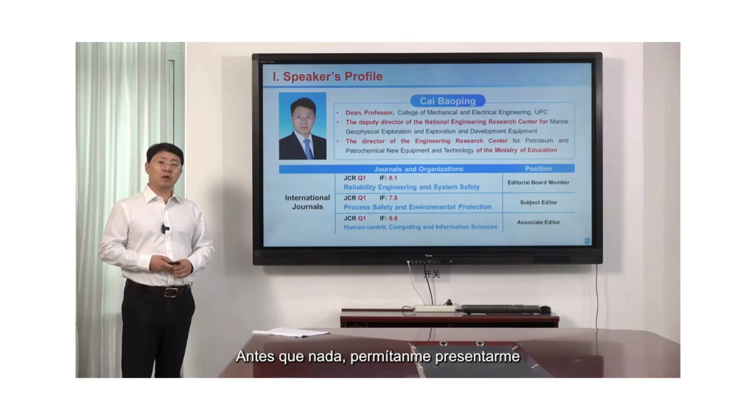First, please allow me to introduce myself. I'm the Dean and Professor of the College of Mechanical and Electrical Engineering. Currently, I serve as the editorial board member, subject editor, and associate editor of 3 SCI indexed journals.

Let me introduce my university. It's located in the beautiful city of Qingdao. China University of Petroleum is short for UPC. It's a national key university, one of the national double first-class universities, and one of the national Project 211 universities.

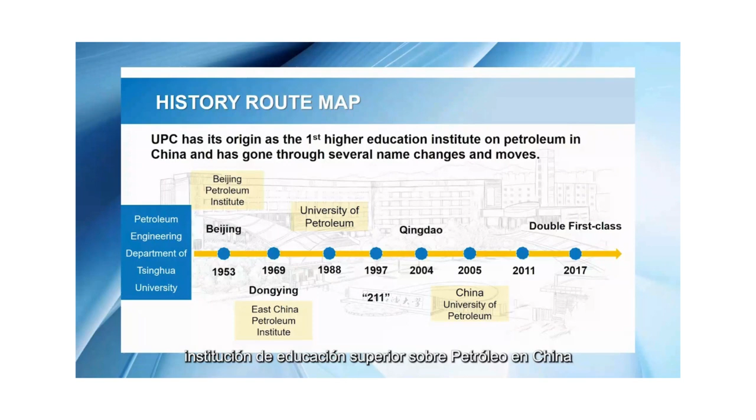UPC has its origin as the first higher education institute on petroleum in China, and has gone through several name changes and moves.

There are more than 19,000 undergraduate students, more than 11,000 postgraduate students, and more than 900 international students. At present, UPC has more than 3,000 faculty and staff, including more than 1,000 professors and associate professors.

We could be proud of the fact that UPC ranks first in the quality of graduates among universities with first-class disciplines, and UPC performs well in many academic rankings.

A lot of resources are invested in scientific research. At UPC, there are 8 national research platforms. UPC's engineering ranked 46th globally.

Our teachers and students have achieved many research results since 2016.

Students enjoy a vibrant, diverse, and safe life at the university. Our campus is a busy place with more than 100 student organizations.

As the Deputy Director of the National Engineering Research Center, I will introduce this institute. It was established by the National Development and Reform Commission in 2016.

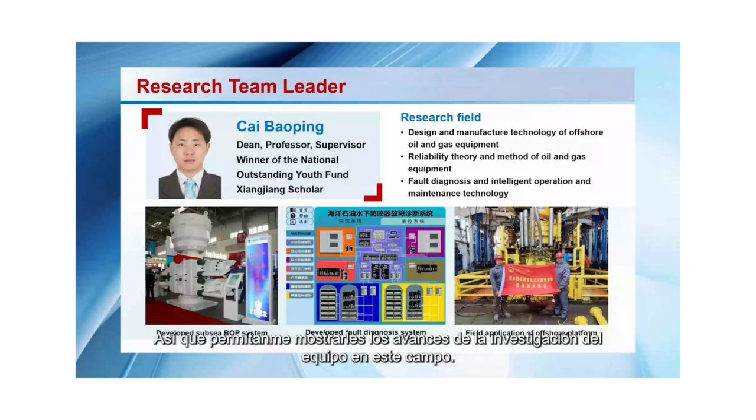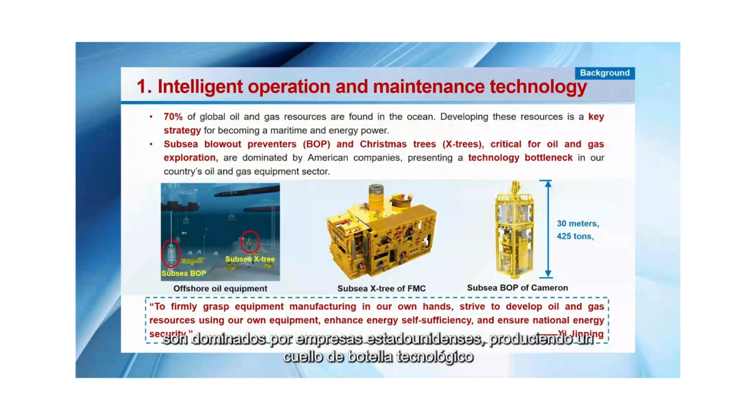Developing these resources is the key strategy for becoming a maritime and energy power. Subsea blowout preventers and Christmas trees, critical for oil and gas exploration, are dominated by American companies, presenting a technology bottleneck in our country's oil and gas equipment sector.

The absence of an efficient solution for ensuring high reliability design and efficient health management of subsea BOP and Christmas tree is a major obstacle to the advancement of oil and gas equipment.

In view of the challenges faced by subsea BOP and subsea Christmas tree, such as poor operating reliability, low diagnosis accuracy, and high operating cost, 3 scientific issues are clarified.

Research on design method, diagnostic technology, and health management method was carried out. 3 innovative outcomes are achieved.

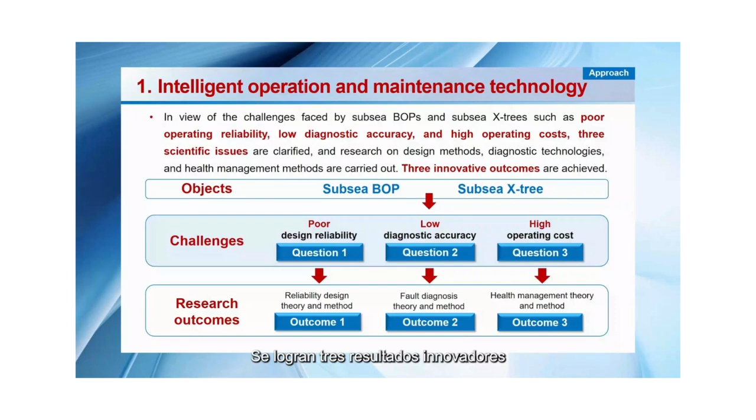In the study of high reliability design method of subsea BOP system, there are many challenges and difficulties in front of us. The reliability of key mechanical components is unevenly distributed. The control system had poor switching performance and weak ability to withstand common cause failure.

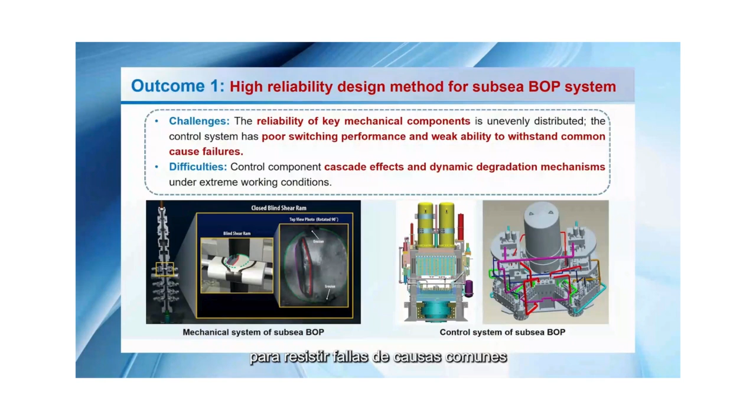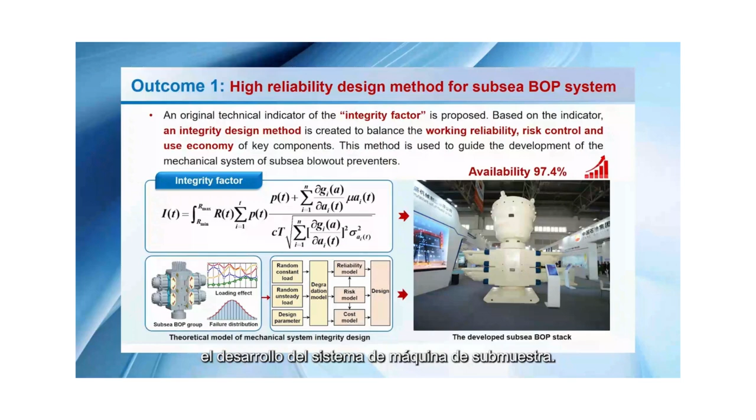An original technical indicator of the integrity factor is proposed. Based on the indicator, an integrity design methodology is created to balance the working reliability, risk control, and use economy of key components. This methodology is used to guide the development of the mechanical system of subsea blowout preventers.

A new concept of source shock probability is proposed. The cascading failure rules of control components are described, and the voting algorithm, arbitration logic, and seamless switching method are developed. Based on the technology, the control system of subsea BOP is developed by a company of China, Rongsheng, which is certified by DNV and API.

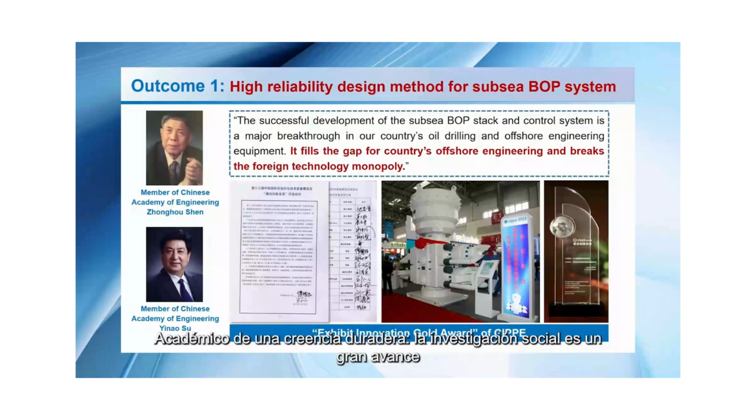The expert group, composed of academics Shen Zhonghou and Su Yinao of the China Academy of Engineering, believes that our research is a major breakthrough in our country's oil drilling and offshore engineering equipment.

Now let's talk about our second outcome, non-permanent and concurrent composite fault diagnosis. In the same way, we faced a number of challenges in conducting this research. Conventional, non-permanent, and concurrent composite faults exist in the subsea BOP and the Christmas tree. The fault characteristics are strongly coupled with noise signal, making it difficult to extract, separate, and diagnose.

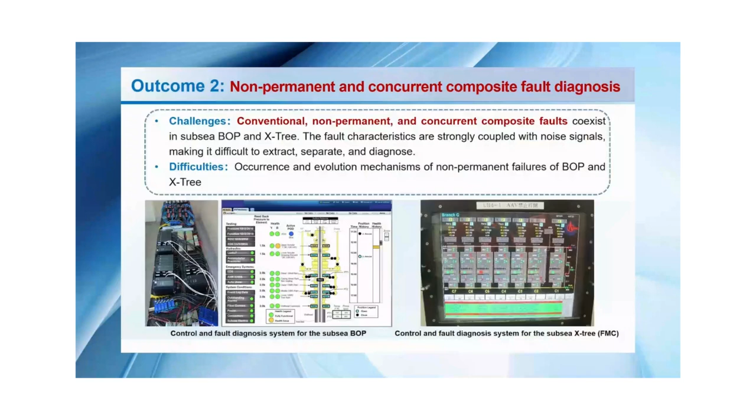The state transition rules of transient, intermittent, and permanent faults of subsea BOP are revealed with Markov models, and a big data-driven online monitoring and fault diagnosis method is proposed. The accuracy of the subsea BOP fault diagnosis reached 98%.

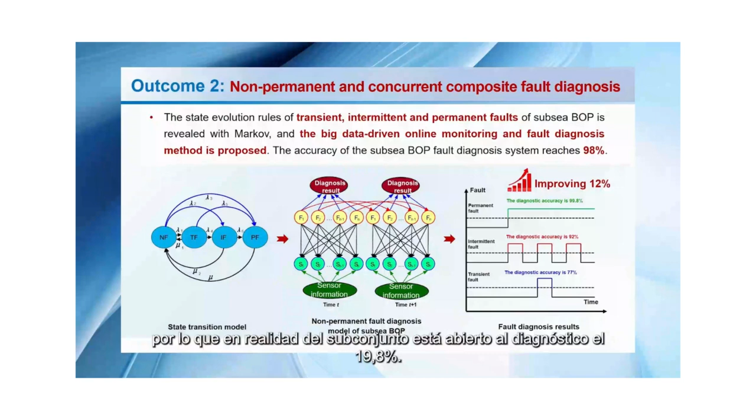The mapping relationship between multi-point concurrent composite fault and multiple symptoms is discovered, and an intelligent fault diagnosis method for subsea tree that integrates multi-source information is developed.

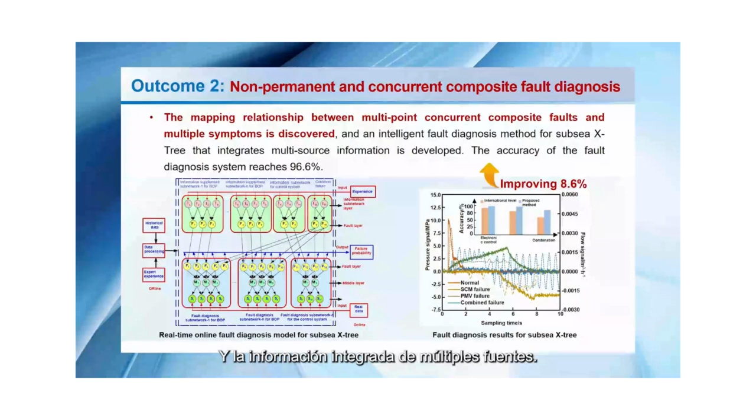Based on this method, several sets of subsea BOP and Christmas tree diagnosis hardware and software have been developed, which are certified by BV and have been used in drilling platforms.

The third outcome is fault prognosis and health management for subsea systems. The health management method lacks deep integration of cyber and physics. This results in low fault prediction accuracy, long maintenance cycles, and high operation cost. Achieving the unity of information and physical system description of subsea BOP and Christmas tree is a difficult problem.

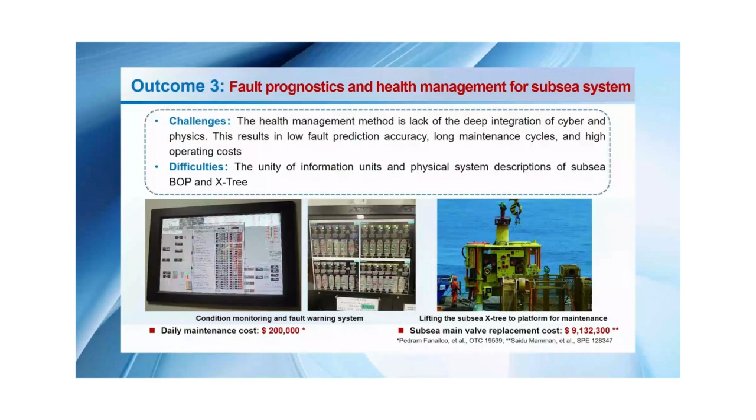To solve the above problem, the phenomenon of equipment degradation dependency leading to sudden change in its RUL is discovered. Combining dynamic update of conflict evidence, real-time interaction, and consistent tracking of equipment, cyber-physics integration is achieved. A re-prediction method is created and a fault prediction software system is developed.

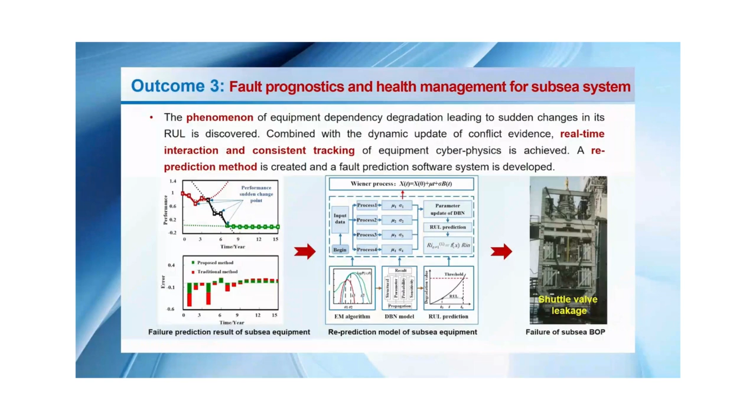The condition-based maintenance method for subsea Christmas tree centered on availability is proposed, and a health management method of early diagnosis, fault prediction, and maintenance decision-making is constructed. The condition-based maintenance software system is used in an oil field in the South China Sea.

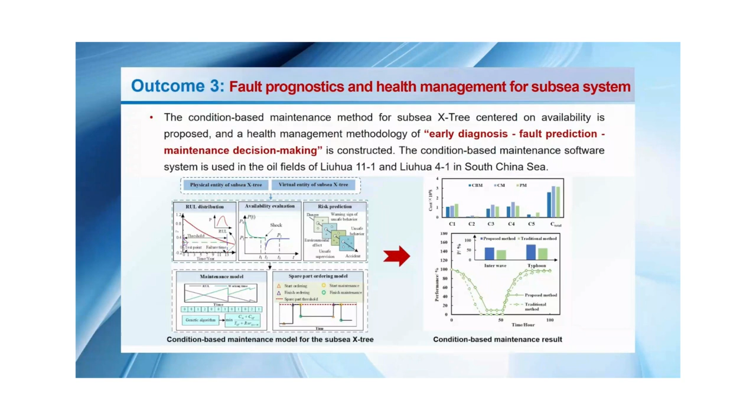Let me show the engineering application of fault diagnosis of subsea BOP control system. We did lab testing. A fault diagnosis experiment is conducted in the offshore oil and gas equipment technology laboratory of China University of Petroleum.

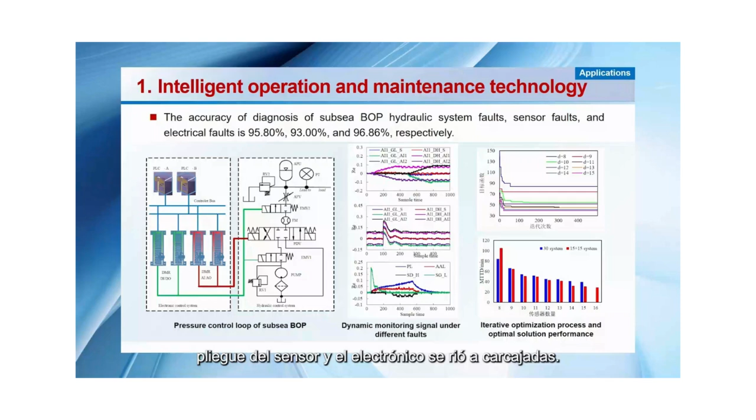The accuracy of diagnosis of subsea BOP hydraulic system fault, sensor fault, and electronic fault are all more than 90%.

We did factory testing. The accuracy of 50 randomly set faults is 100%, and the BV company conducted a third-party witness on the entire process.

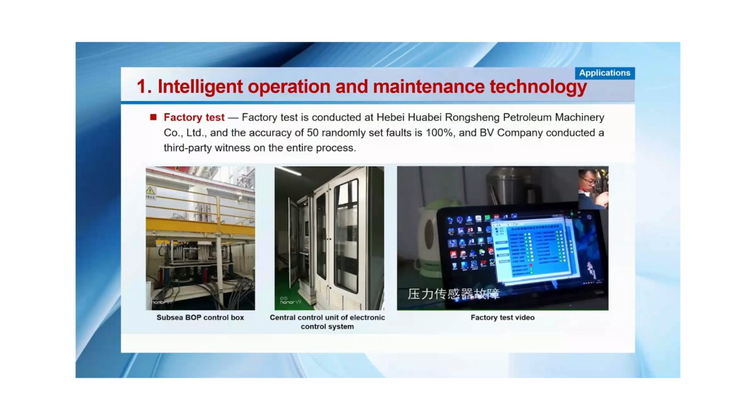Most important of all, our team went to the offshore plant to test the system. On-site testing is conducted on subsea BOP of offshore drilling platforms Haiyang Shiyou 981 and Nanhai number 10.

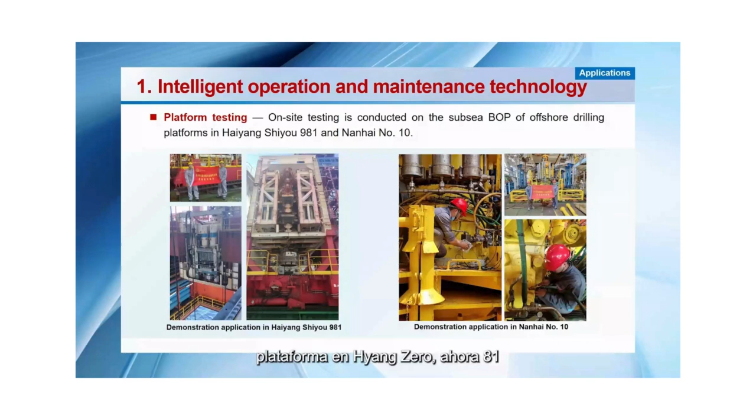Now, what I'm showing you is the intelligent operation and maintenance system of subsea production system. The on-site testing is conducted on the subsea Christmas tree in Liuhua 41 oil field.

The diagnosis accuracy of the minor and compound faults in subsea production system is 98.4% and 96.7% respectively.

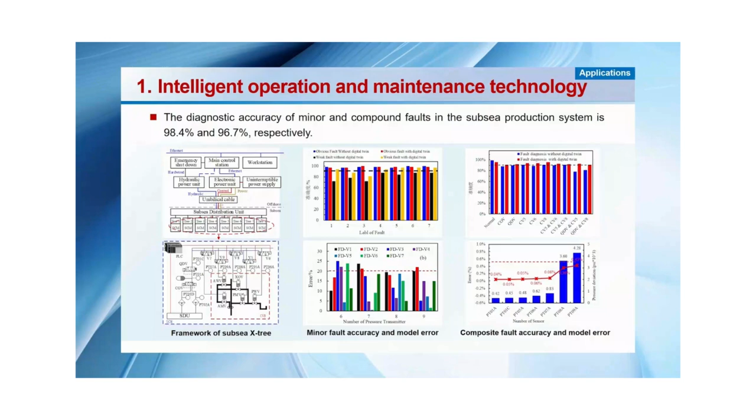Next, I will introduce the in-depth profile control and water shut-off technology. The technology comes from Professor Dai's team. Professor Dai is a winner of the National Science Fund for Outstanding Young Scholars, a Changjiang Scholar, and a leading talent in the Ten Thousand Talents Plan. Her team's research interests include oilfield chemistry and EOR, and chemical water control technology for high water cut oil fields.

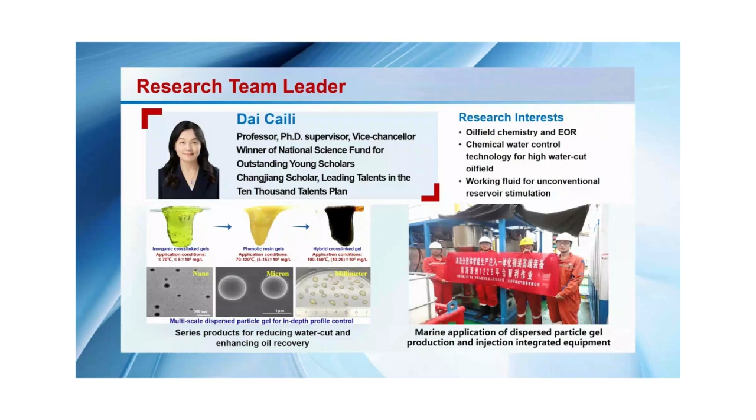In the process of water flooding development in oil fields, water tends to break through along high permeability layers or fractures, resulting in higher water production and low oil production.

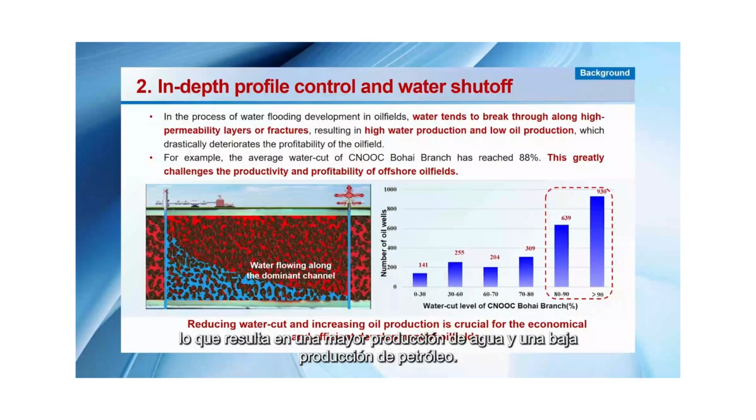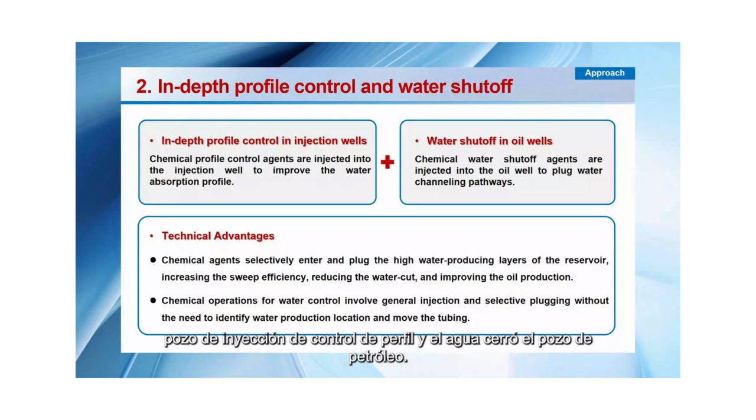To solve the above problems, Professor Dai proposed in-depth profile control in injection wells and water shut-off in oil wells. This approach can increase sweeping efficiency, reduce water cut, and improve oil production without needing to identify the water production location or move the tubing.

The first outcome is dispersed particle gel for in-depth profile control, utilizing crosslinking and dispersion technology. Dispersed particle gels with different particle size distributions are obtained by mechanical shearing and physical rounding of specific bulk gel formed on the ground.

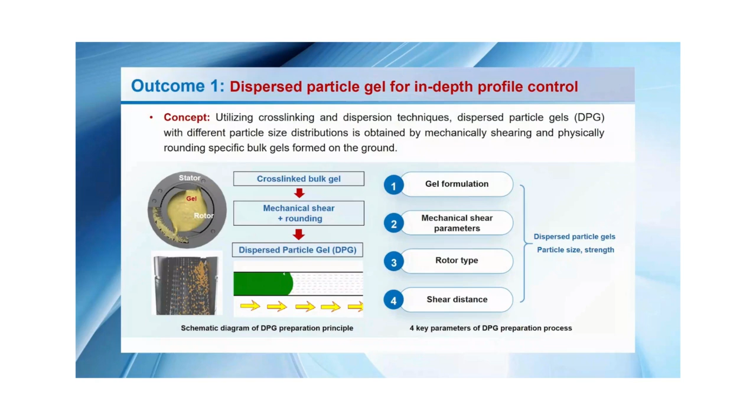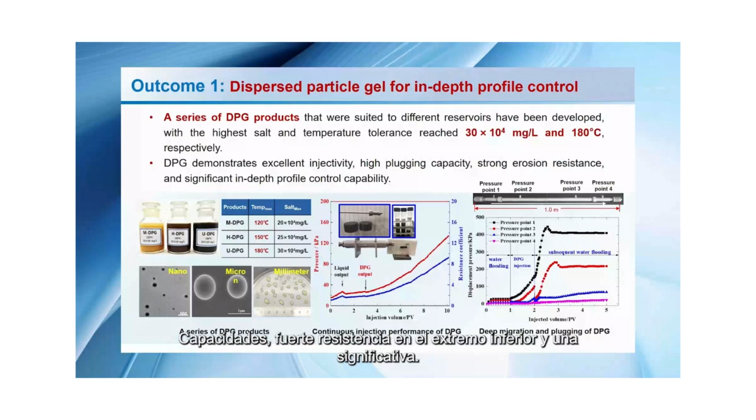A series of DPG products suited for different reservoirs have been developed. DPG demonstrates excellent injectivity, high plugging capacity, strong erosion resistance, and significant in-depth profile control capability.

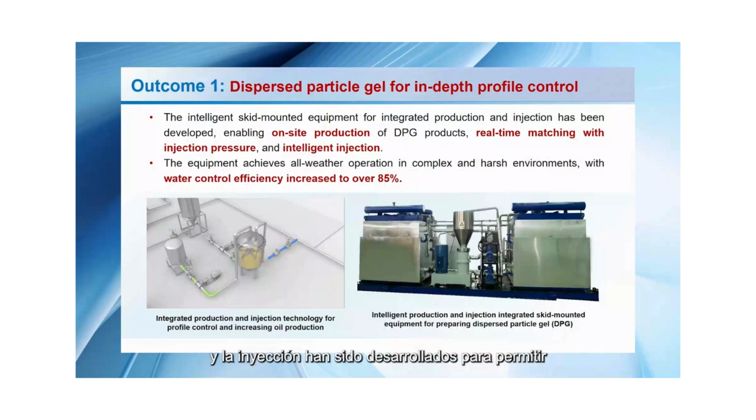Intelligent skid-mounted equipment for integrated production and injection has been developed, enabling on-site production of DPG, real-time matching with injection pressure, and intelligent injection.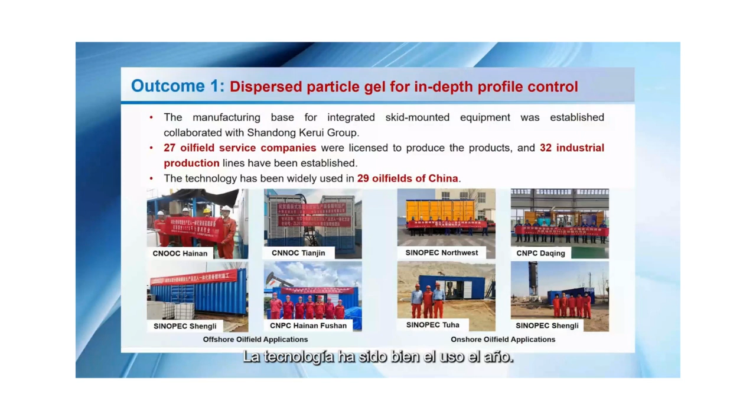27 oilfield service companies were licensed to produce the products, and 32 industrial production lines have been established. The technology has been well used in 29 oil fields in China.

The second outcome is water shut-off in oil wells. For different water invasion types, the following processes have been developed: pressure-temperature field matched sequential in-depth water shut-off; chemical barrier for controlling bottom water ridge advancement; and integrated nitrogen-CO2 energetic drainage plugging for water control.

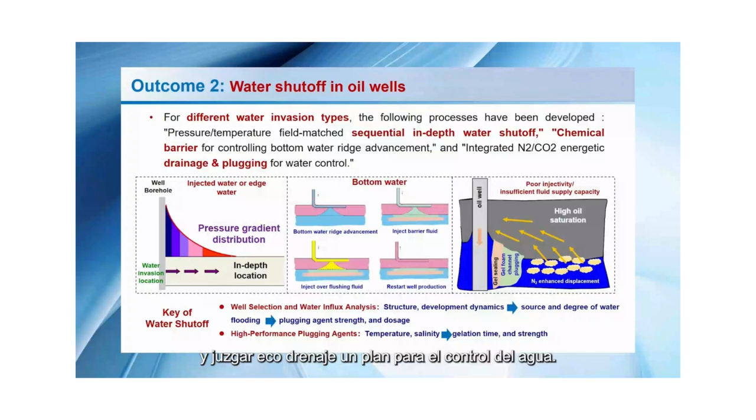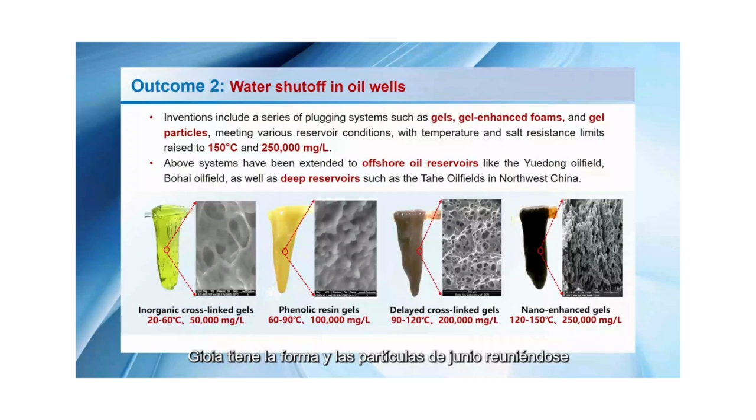Inventions include a series of plugging systems such as gel-enhanced foam and gel particles, meeting various reservoir conditions. Since 2015, 160 water shut-off operations have been finished, with an 85% success rate.

Next, I want to share deep water wellbore flow safety control technology with you. The technology was proposed by Professor Sun Baojiang, a Changjiang scholar of China University of Petroleum. His team's research interests include the theory and technology of deep water oil and gas drilling well control, and deep water wellbore natural gas hydrate prevention technologies.

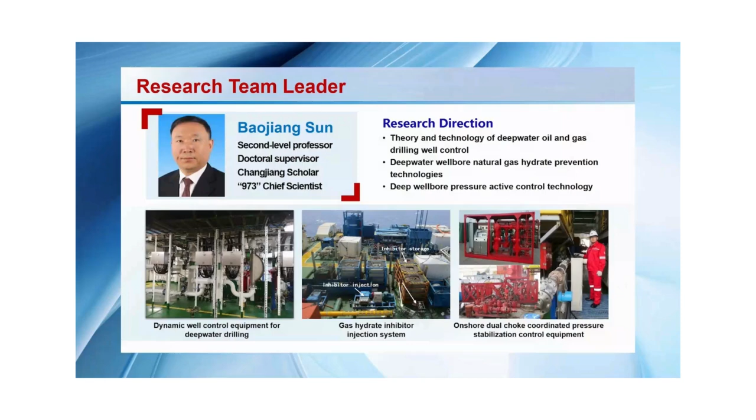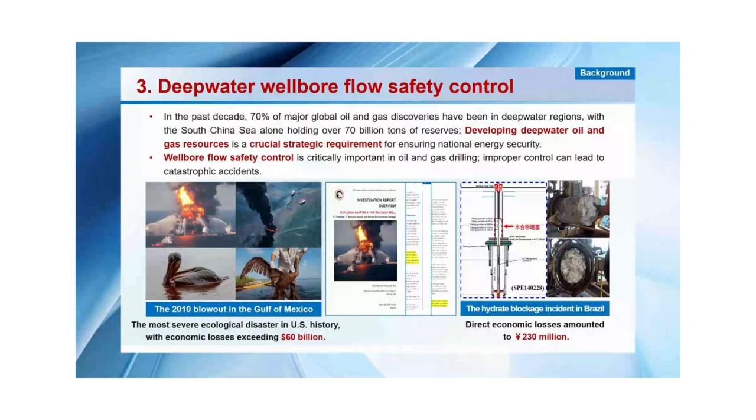Wellbore flow safety control is critically important in oil and gas drilling. Improper control can lead to a big accident. China's deep water and deep oil and gas resources are abundant, but the resources are characterized by 3 high, 1 low, and 1 narrow factors. Wellbore flow safety control faces more serious challenges.

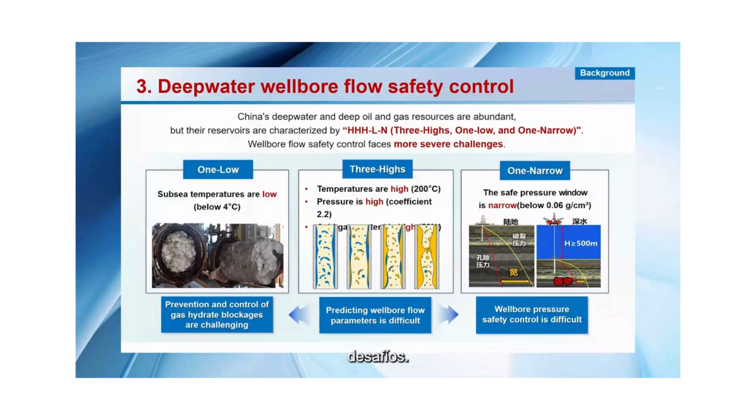To solve this problem, Professor Sun's team proposed 3 inventions, established the enterprise standard and regulation for well control, and demonstrated their application internationally.

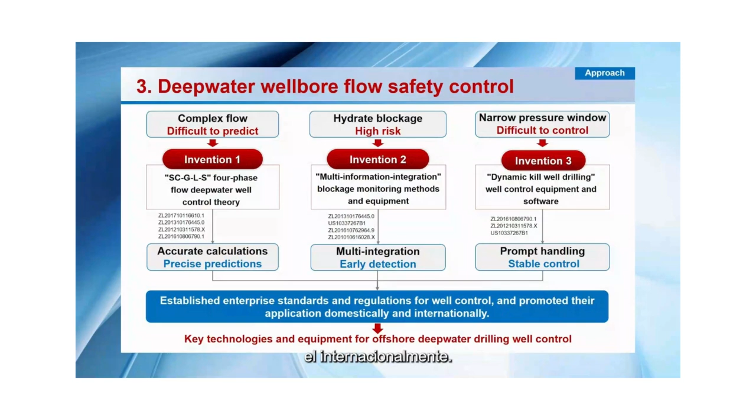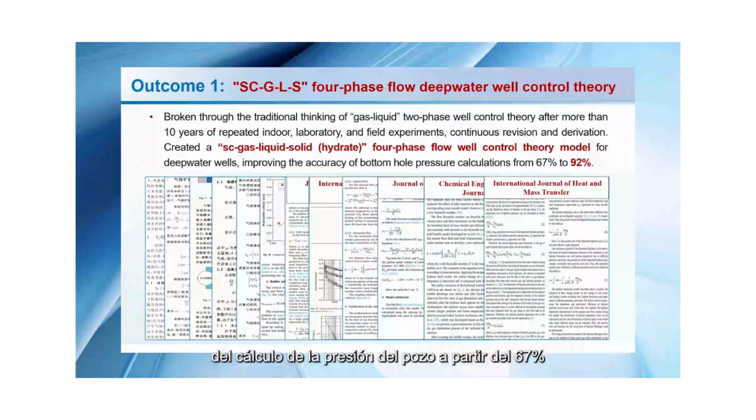The proposed method improved the accuracy of the bottom hole pressure calculation from 67% to 92%.

The second outcome is the key technology and application for hydrate prevention. They established a multi-component hydrate phase equilibrium prediction model considering the influence of acid gases, and proposed a dynamic prediction method for hydrate formation under different conditions. During deep water gas well testing, they achieved real-time precise location of hydrate formation positions, laying the foundation for efficient hydrate prevention.

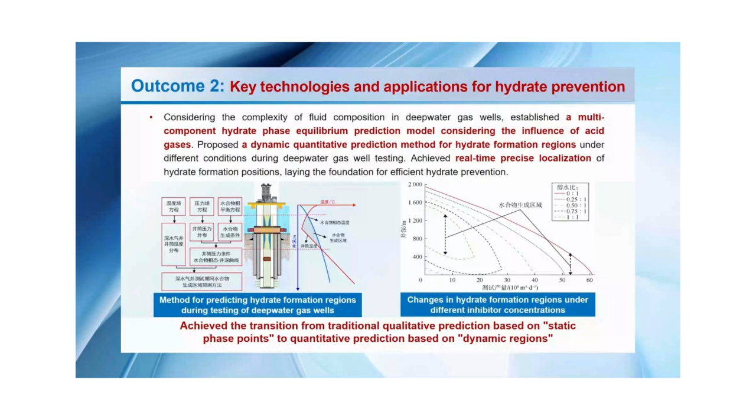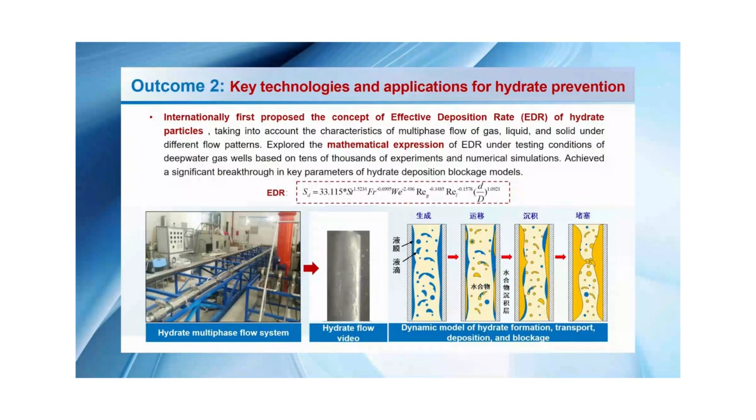They proposed the concept of effective deposition rate of hydrate particles, taking into account the characteristics of multi-phase flow of gas, liquid, and solid under different flow patterns. They established a dynamic model for hydrate formation, transport, deposition, and blockage during deep water gas well testing, with prediction accuracy exceeding 92%, resolving the challenge of accurately locating hydrate blocking risk during deep water gas well testing.

They selected dual effect inhibitors and proposed a method for hydrate blockage prevention, involving the synergy between insulation testing fluid and the dual effect inhibitors, greatly reducing the risk of hydrate blockage.

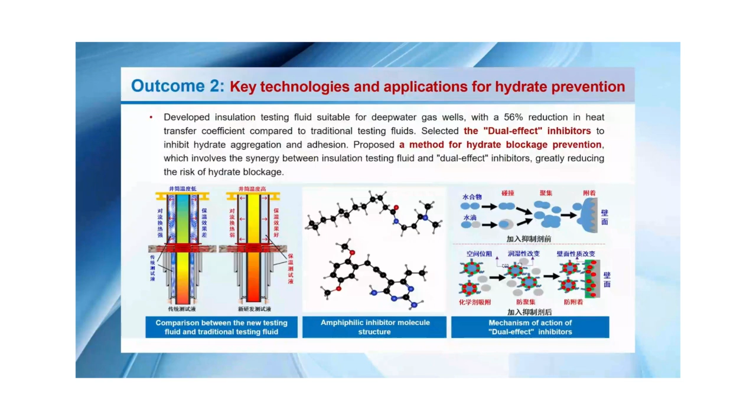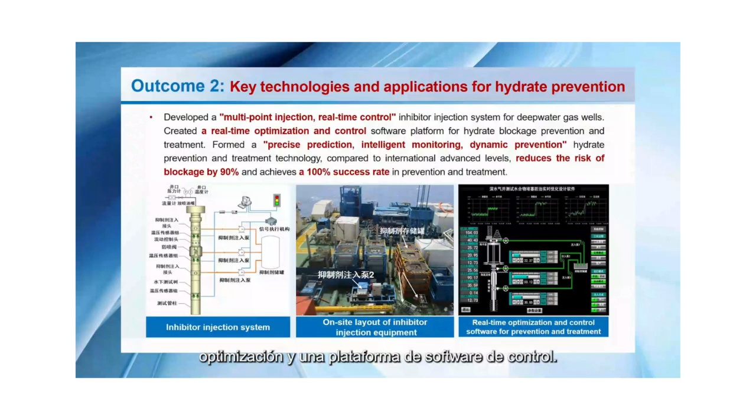Professor Sun's team developed a multi-point injection, real-time control inhibitor injection system for deep water gas wells, and created a real-time optimization and control software platform.

The third outcome is technologies and equipment for drilling well control. Professor Sun's team developed a downhole transient response measurement device for temperature and pressure during drilling.

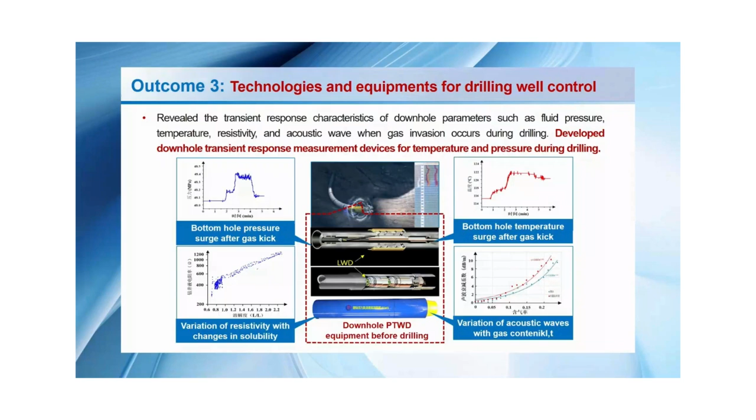They created a multi-information integration block warning software based on downhole and surface flow rates, and invented a multi-information integration early gas kick monitoring technology and equipment from downhole and surface.

The team developed the leading deepwater well control software platform. They achieved real-time optimization and control of well control parameters, providing the brain for the well control equipment.

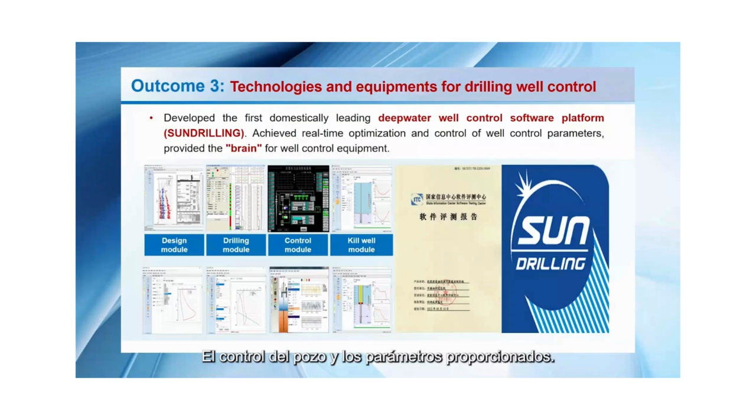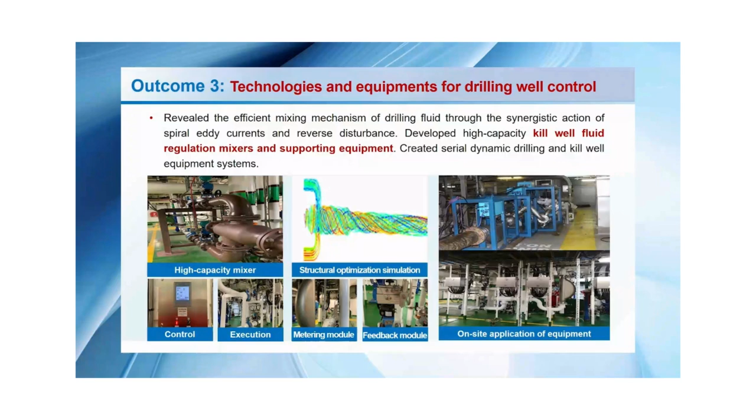They developed high-capacity kill well fluid regulation mixers and supporting equipment, and created a series of dynamic drilling and kill well equipment systems. The active wellbore pressure control technology has been applied in many wells across several deepwater oil and gas fields.

Next, I want to share offshore engineering equipment design and manufacturing with you. The technology was proposed by Professor Xiao Wensheng, director of the National Engineering Research Center. His team's research interests include theory and technology of offshore oil and gas equipment, permanent magnet direct drive drilling oil and gas equipment technology, and so on.

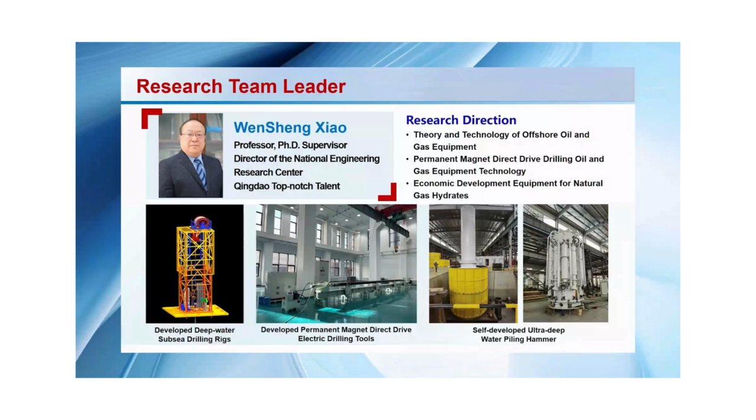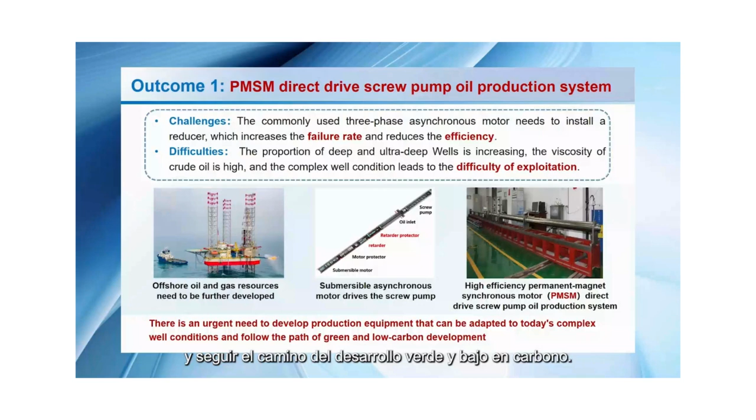China's offshore engineering equipment manufacturing industry has low market share, insufficient research and development, and several other problems. The commonly used three-phase motor needs to install a reducer, which increases the failure rate and reduces efficiency. There is an urgent need to develop production equipment that can be adapted to today's complex well conditions and follow the path of green and low carbon development.

In view of the current industrial pain points, the team, after 3 years, designed and developed a set of subsea PMSM-based submersible oil production equipment, which is suitable for the current situation of high sand and heavy wax oil wells, with high efficiency, strong reliability, and low energy consumption.

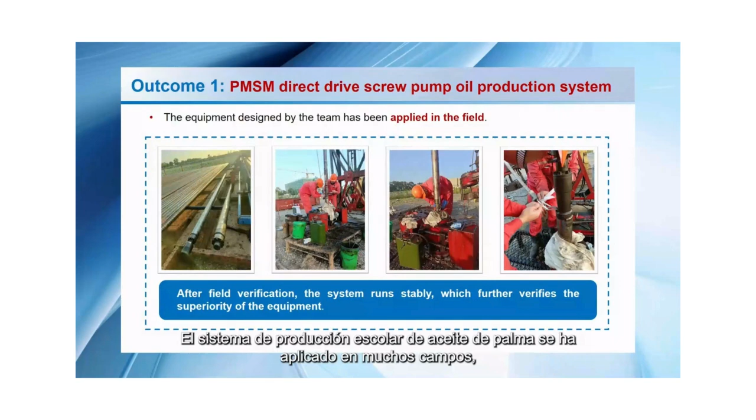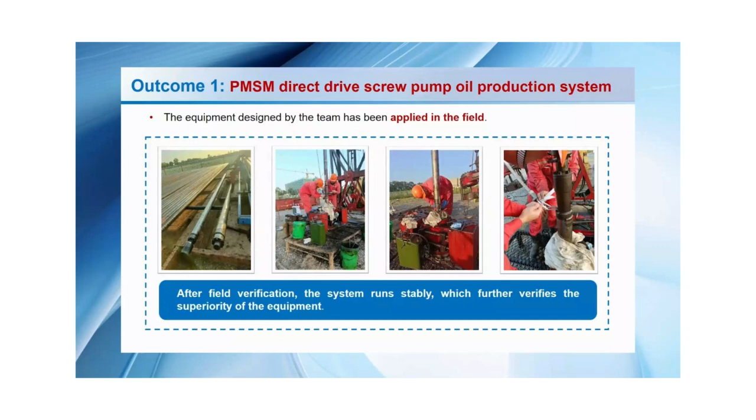The PMSM direct drive screw pump oil production system has been applied in many fields. After verification, the system runs stably, which further confirmed the superiority of the equipment. With its advantages of energy saving, high efficiency, and low failure rate, the equipment is unique in the exploitation of complex well conditions.

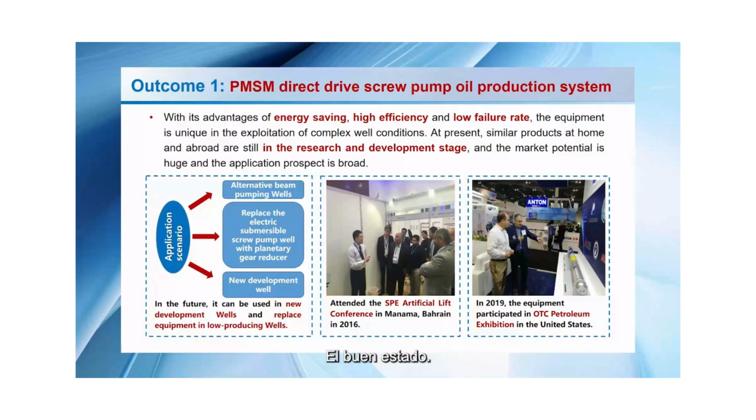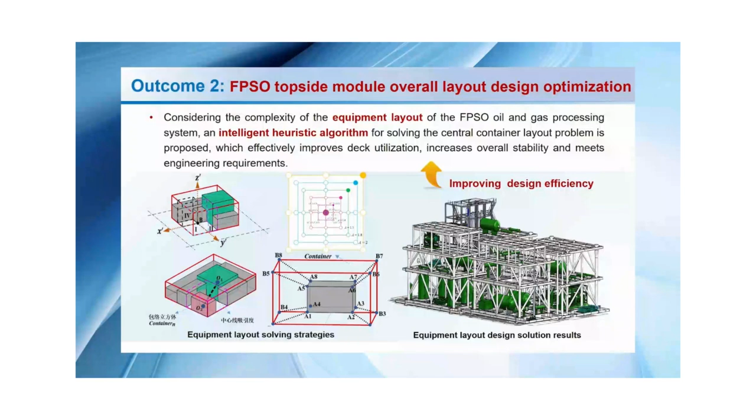The intelligent optimization hybrid algorithm for solving a multi-pipe layout problem of a complex system is proposed, which efficiently reduces the pipe construction cost and the pressure loss.

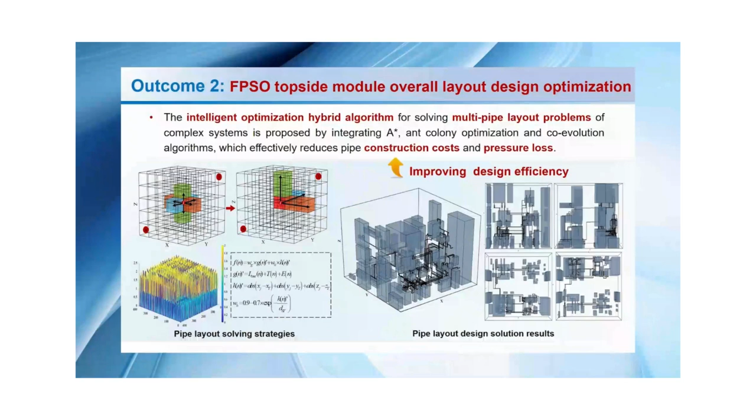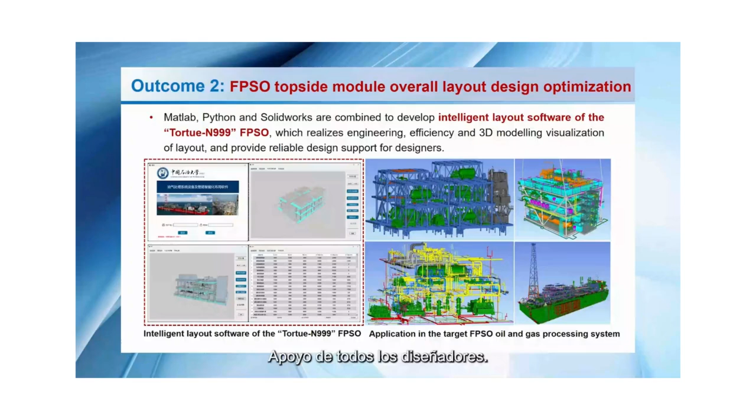Ultra-deepwater pile hammer is the key equipment necessary for deepwater penetration pile installation.

According to the impact characteristics, the force relationship between each component, its analysis, and the underwater impact system model is finally established.

The vibration analysis and vibration reduction technology research is also conducted by the team.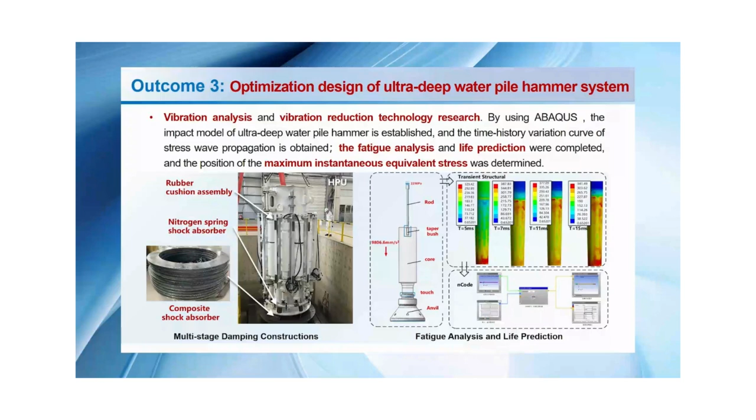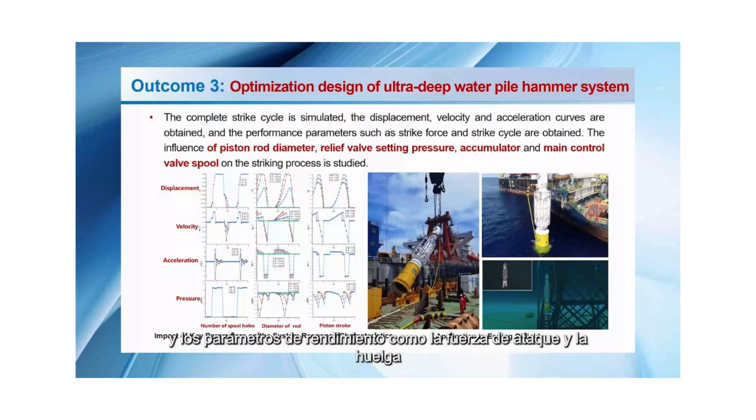The complete strike cycle is simulated. The displacement, velocity, and acceleration curves are obtained, and performance parameters such as strike force and strike cycles are obtained.

Next, I want to share Riser Design Safety Assurance Technology. The technology was proposed by Professor Chen Guoming.

Professor Chen is one of the national-level talents in the new century. His team's research interests include marine structure safety technology, oil and gas safety engineering information, and intelligent technologies.

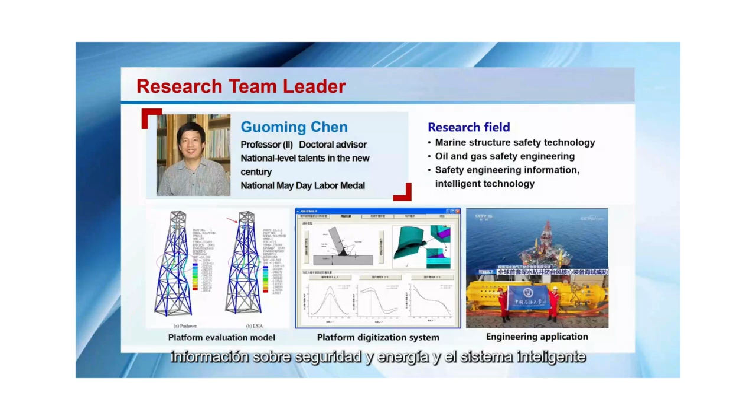Riser subsea wellhead is the throat of the exploration and development of deepwater oil and gas resources. Riser safety accidents occur frequently, which may include operational failure accidents caused by extreme load and integrity failure accidents caused by long-term load.

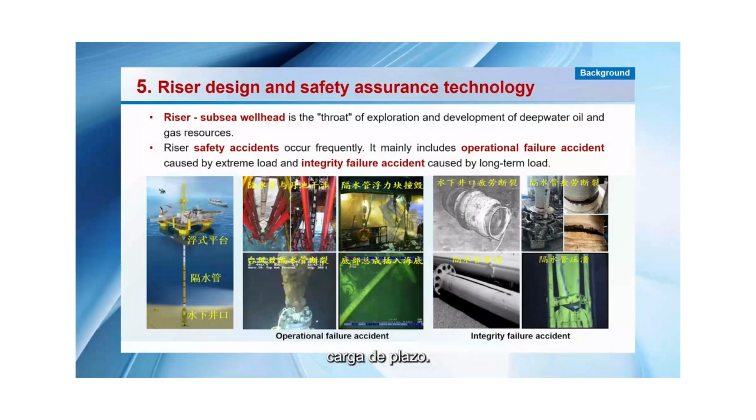To address the challenges posed by the unclear coupling mechanism, incomplete safety operation decision, and different safety management in the drilling riser subsea wellhead system, 3 scientific issues are identified, leading to research in theoretical method, operating safety, and structure integrity. 3 innovation outcomes are achieved.

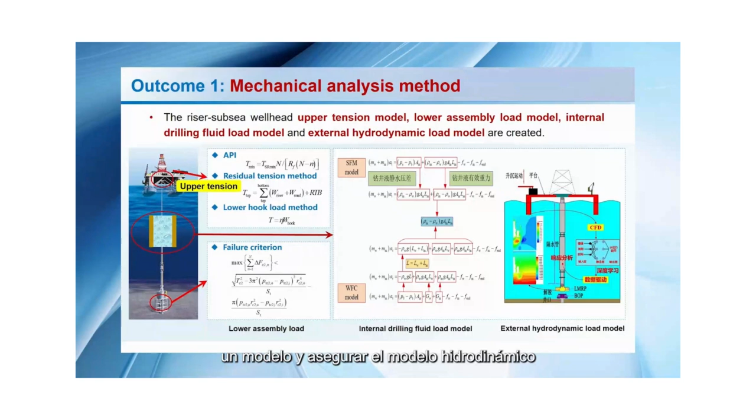The first outcome is a mechanical analysis methodology. The riser subsea wellhead upper tension model, lower assembly load model, internal drilling fluid load model, and external hydrodynamic load model are created.

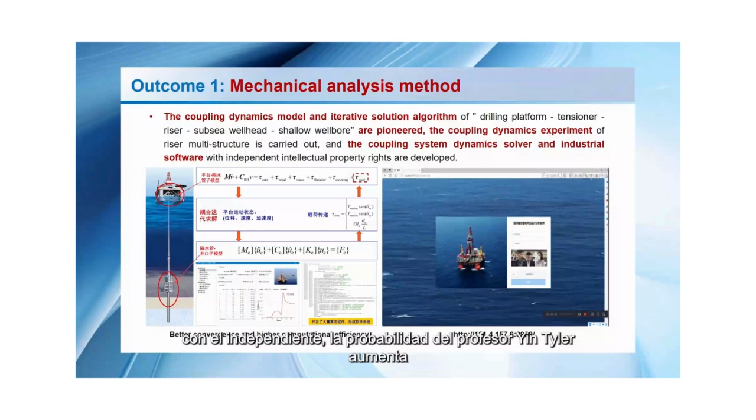The coupling dynamic model and iterative solution algorithm of drilling platform, tensioner, riser, subsea wellhead, and shallow wellbore are pioneered. The coupling dynamics experiment of riser multi-structure is carried out, and the coupling system dynamic solver and industrial software with independent intellectual property rights are developed.

The hysteresis effect of riser subsea wellhead response, the large deformation and stress phenomenon, and the response pattern, the promoting and inhibiting effect of the riser on platform drift movement, the inhibiting effect of the tensioner on riser lateral deformation, and the 5-stage response process under internal wave are found.

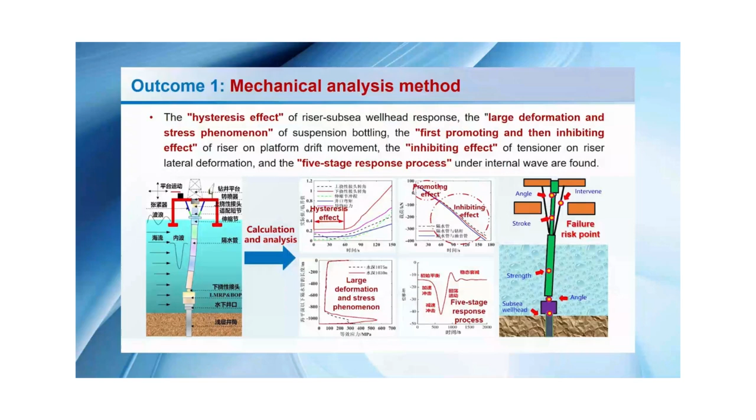A quick analysis method of safety operating window is developed, and a complete set of safety operation windows for lower installation, connecting drilling, emergency disconnecting, and hanging recovery is established.

Based on the multi-structure full coupled model, the state inversion algorithm and operation safety control strategy of the riser subsea wellhead system are proposed, and the real-time monitoring and early warning system of the riser subsea wellhead is integrated.

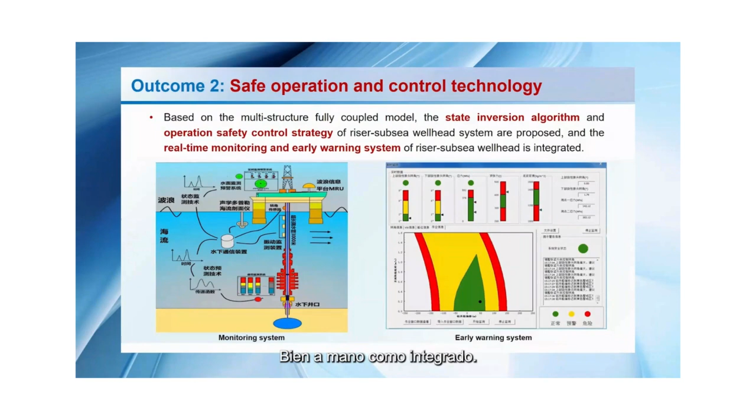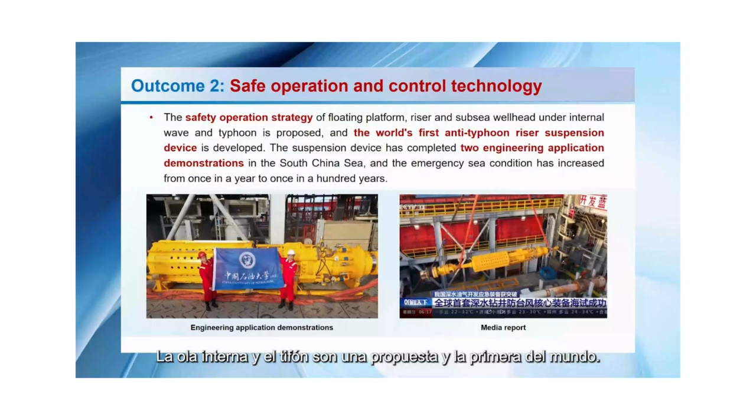The safety operation strategy of floating platform, riser, and subsea wellhead under internal wave and typhoon is proposed, and the world's first anti-typhoon riser suspension device is developed.

The suspension device has completed 2 engineering applications demonstrated in the South China Sea, and the emergency sea condition tolerance has increased from once in a year to once in 100 years.

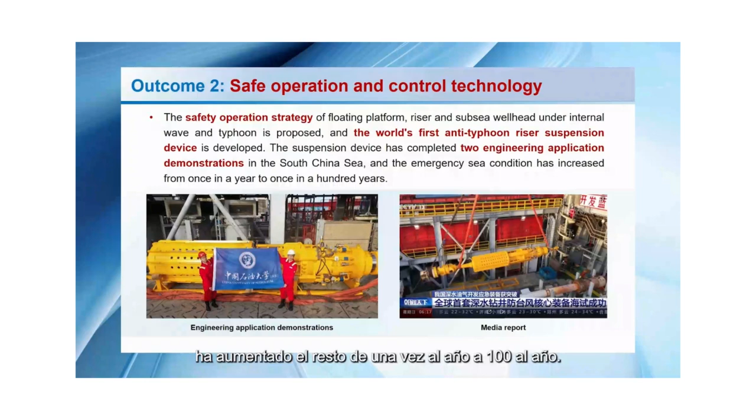The whole life cycle integrity evaluation model of riser and subsea wellhead is established considering the coupling relationship of each failure mode. The resonance bending fatigue test equipment, special test piles, and the device for the riser and subsea wellhead are successfully developed.

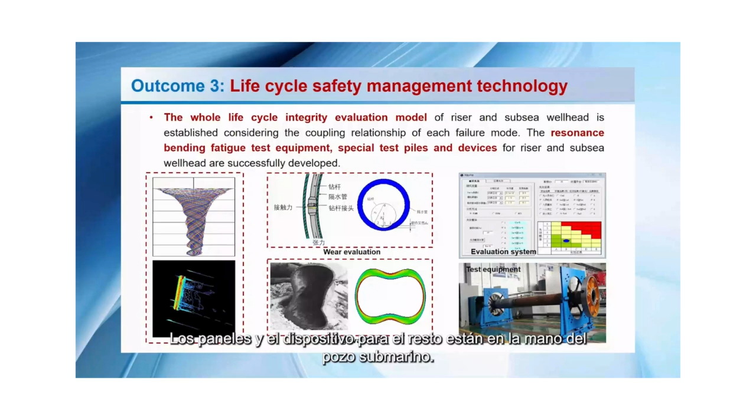A reliability update model for riser and subsea wellhead is established by integrating the integrity assessment model, inspection data, and maintenance information. Multi-level maintenance optimization technology for risers and subsea wellhead is created to minimize operation and maintenance cost, and an integrity management system is developed.

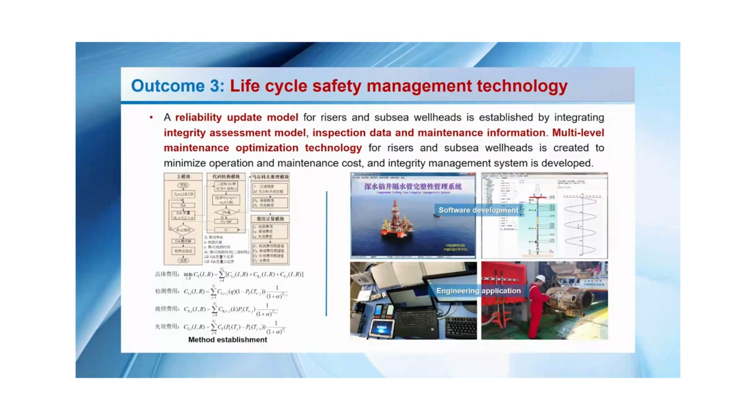The following are the applications of the riser design and safety assurance technology. The research results have been widely applied to more than 15 wells in the South China Sea.